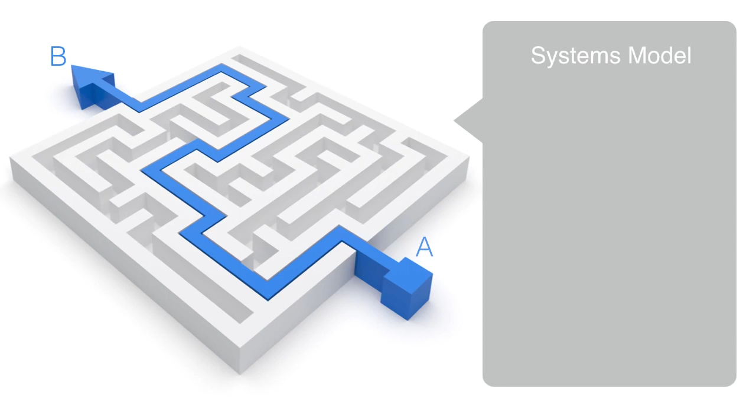In this model, we have a current state A and a future desired state B. This could be anything from being on one side of a river, state A, and wanting to get to the other side, state B, or being cold and wanting to get warm, and so on. We then have some kind of environmental constraints between state A and B. These environmental constraints generate the problem space that we need to resolve in order to get to state B.

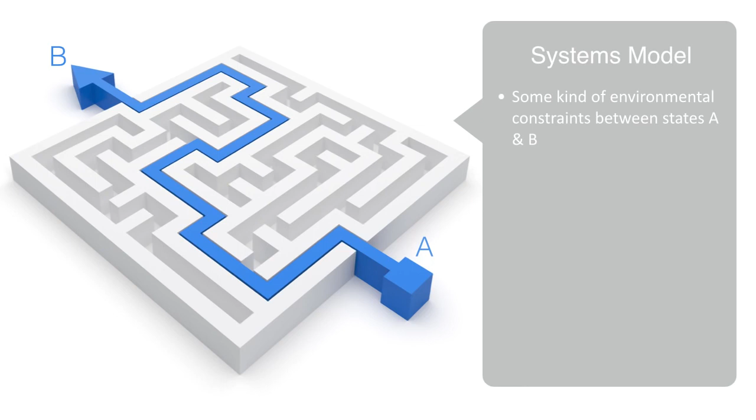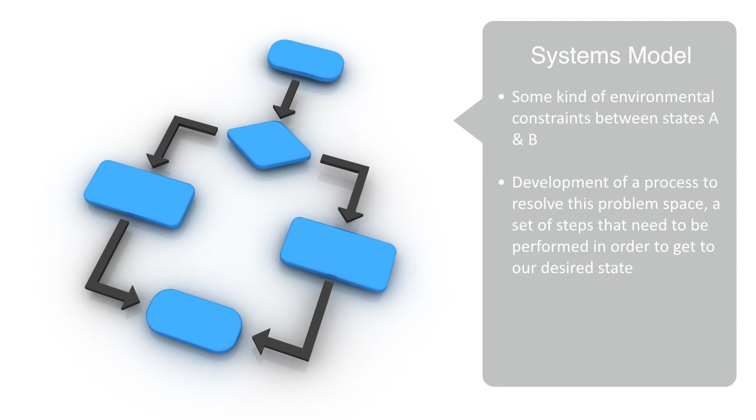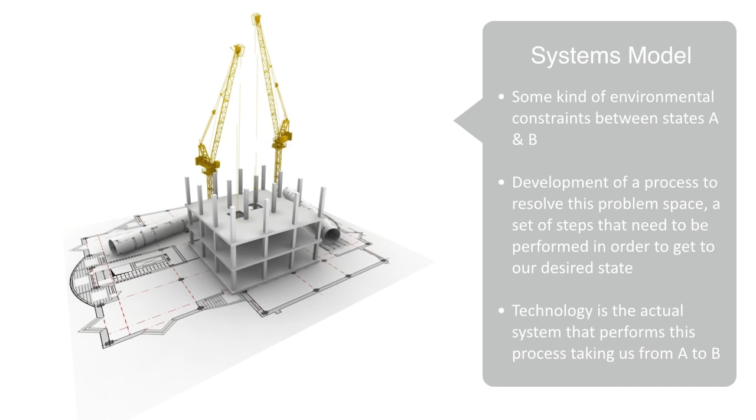Engineering, then, is the development of an algorithmic process to solve this problem space, that is to say, a set of steps that need to be performed in order to get to our desired state. Technology is the actual system that performs this process, taking us from A to B. In this way, we can then think about technologies as systems, in that they have some input of resources, and they perform a function on these inputs in order to produce some desired output.

Although technologies are different from natural systems, as we've already noted, we can only properly give them context by understanding them as also extensions of natural processes.

Technologies are both a very organic part of human beings and an extension of us. Almost all technologies can be traced back to some initial process that was performed by our unaided natural physiology, whether we're talking about transportation performed originally by walking, or telecommunications performed originally by our vocal system.

Through endless iteration of these natural processes and innovation, we have rationalized these processes and embodied them in external automated systems that can typically perform the process more efficiently and effectively. By automation, we mean that through having rationalized this process, we no longer have to look for a solution to it each time. The technology is the solution, we just have to operate it. The word automatic means acting by itself. In other words, the technology has automated part of the process.

I don't need to think about how I'm going to get to work each day. I simply get in my car and drive. I don't even need to know how it actually converts the input to the system, that is liquid fuel, into the functional output, that is personal mobility. And I don't need to think about it because the technology was designed specifically to automate this process.

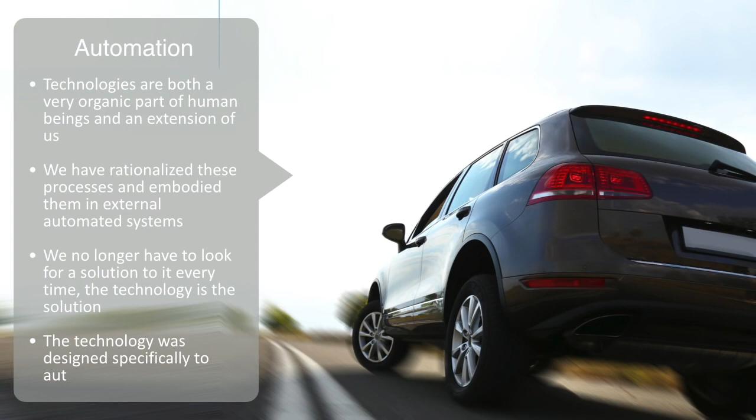All systems operate at some degree of efficiency, and efficiency is a central concept in engineering. The second law of thermodynamics tells us that in this processing of energy and resources, there will always be an increase in entropy. That is to say, when we run this technology system, it will produce some waste product that either remains in the system, degrading its functionality over time, or gets exported to its environment.

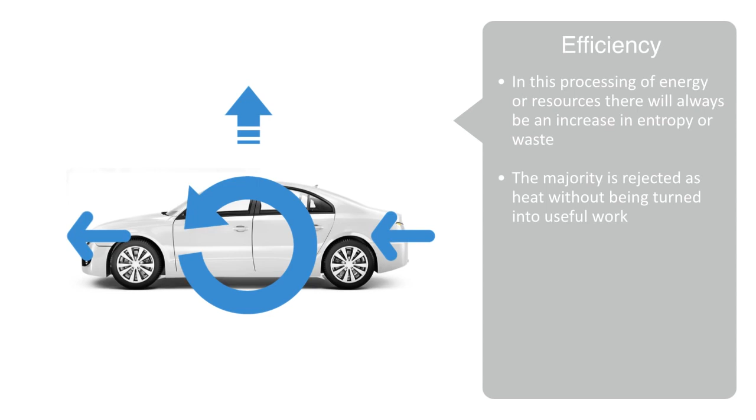When I operate my car, only about 25 to 30% of the energy released by the fuel is used to move the vehicle. The vast majority is rejected as heat without being turned into useful work, and this entropy must be exported from the system or else it will damage its functioning.

This entropy, of course, does not just disappear. The heat, along with other forms of waste, such as noise and gas emissions, go into the system's environment. From this, we can define the system's efficiency and begin to reason about its sustainability.

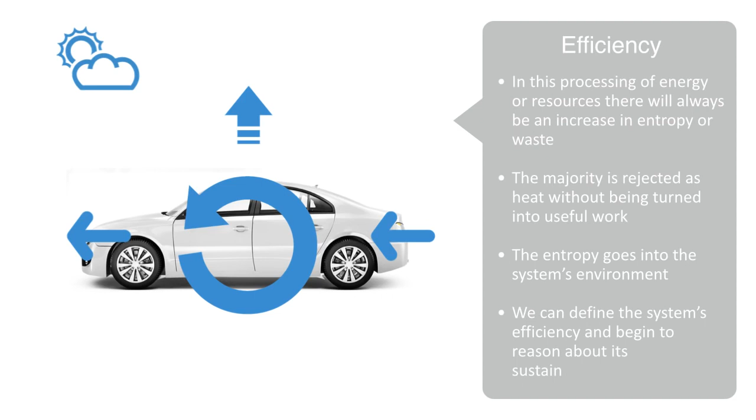Sustainability is another very abstract concept, but in its essence, it describes the relationship between a system and its environment. It is essentially a function of, on the one hand, the volume of resources the system requires, coupled with the environment's stock of resources accessible to the system, and on the other hand, the amount of entropy the system produces, combined with its environment's capacity to absorb that entropy without degrading its capacity to continue providing the system with a future supply of resources.

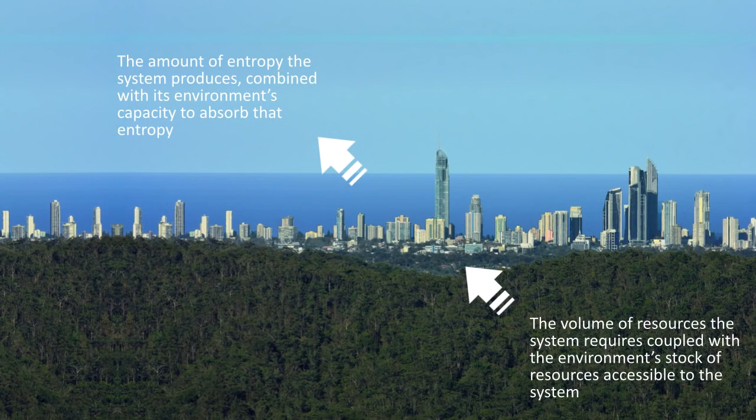In trying to overcome some environmental constraint, we also manipulate the environment. We alter it according to our set of instructions. An artificial system, then, is one that is designed according to some set of principles that do not integrate with the natural processes and thus work to disintegrate the natural environment.

This might also be called hacking, the re-engineering of a subsystem within a larger integrated system in order to optimize it according to a set of principles that do not integrate with the overall pattern of organization, and thus work to disintegrate the macro system and reduce its sustainability.

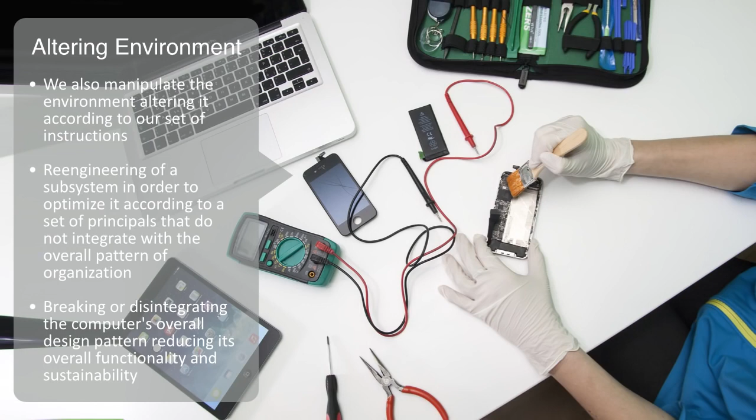Optimizing a computer's processing unit for speed, what is called overclocking, is another example of hacking. We are optimizing a subcomponent and thus breaking or disintegrating the computer's overall design pattern, which will ultimately work to reduce its long-term functionality and sustainability.

When we talk about sustainability and a technical system within its environment, we're no longer just dealing with the quantitative technical efficiency of the system. We have to also ask the qualitative question of why we use the technology in the first place.

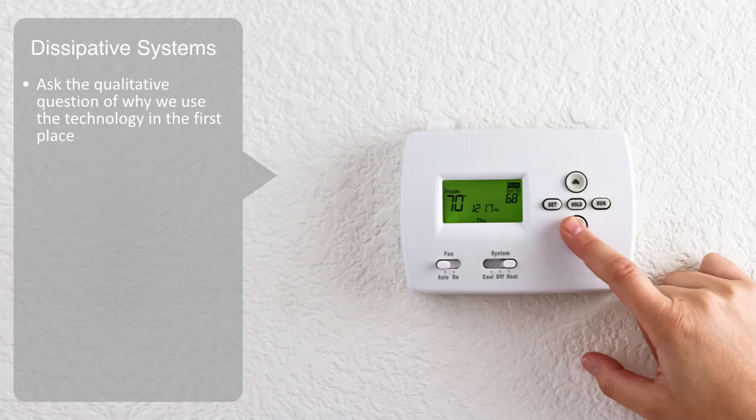When we run a system, it produces some output. If this output is immediately consumed without becoming the input to a new process, then we can refer to this as dissipation, meaning that the energy is dispersed or scattered, thus increasing the entropy and decreasing its capacity to do work.

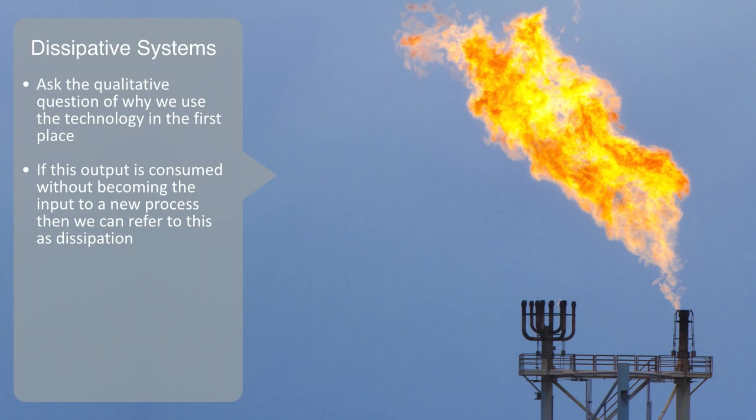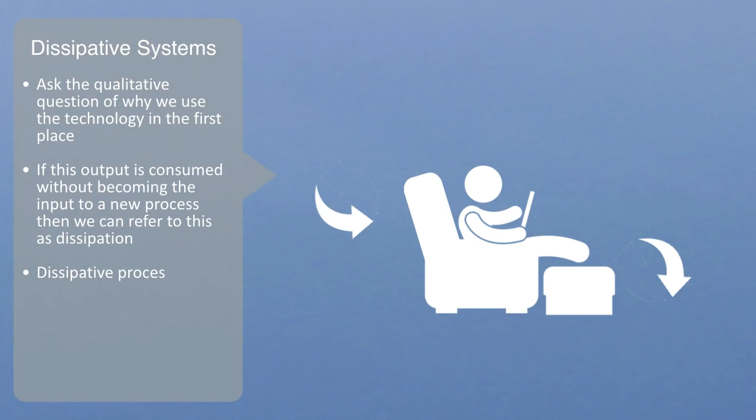The resource has been used up and is no longer available for work, at least not at the same level of functionality as before. If I use my iPhone to play computer games, the output to this process can't be used to enable another function. The resources inputted to enable the operation of that technology have been dissipated. Dissipative processes generate entropy and are typically time irreversible. We can't take the output and go back to feed it into the input again because it has been degraded during the operation.

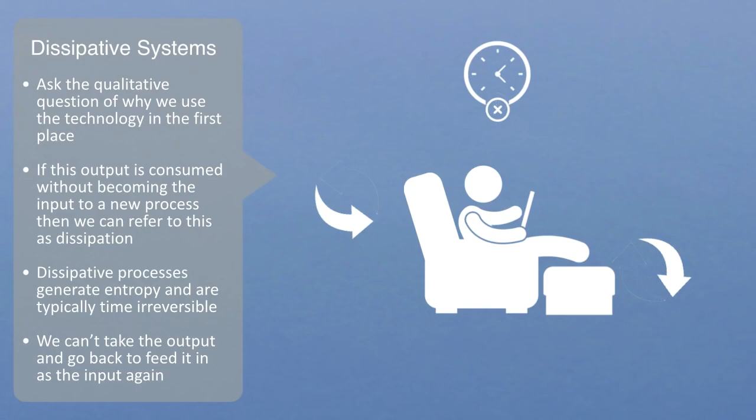Inversely, the output of this system might be used to fuel another. For example, the processing of crude petroleum within a refinery is required in order to produce the input for a vehicle of transportation. This is an example of an anabolic process, that is, one that requires an input of energy in order to refine or synthesize basic resources into resources of a higher quality.

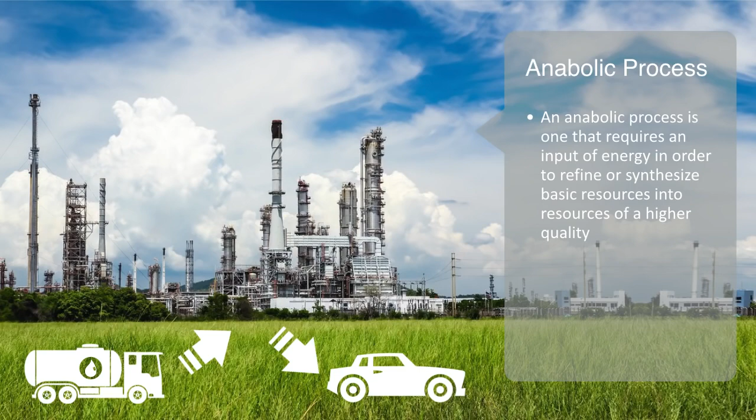The assembly of parts on a production line into a finished product is another example. It requires work to be done, that is to say, the system performing a function in order to produce some throughput of a higher value. The conversion of coal into electricity is another example, as electricity is a much higher quality energy than coal.

With functionality and throughput, we get what is called emergence. When we're supported by a system of technologies that are working effectively, they enable us to function at a new level of organization. Technology offers the possibility for us to be more productive and live a better quality of life.

Infrastructure systems are good examples of this. Unlike consumer goods, the throughput to infrastructure systems like transportation and electrical power networks enable other technologies to function more efficiently. In this way, we get emergence as we move up the different levels of our technological substrate, and thus the infrastructure systems that form the base of this can have a powerful leveraging effect, where when you invest $1 in infrastructure, you can get $3 worth of overall economic value back.

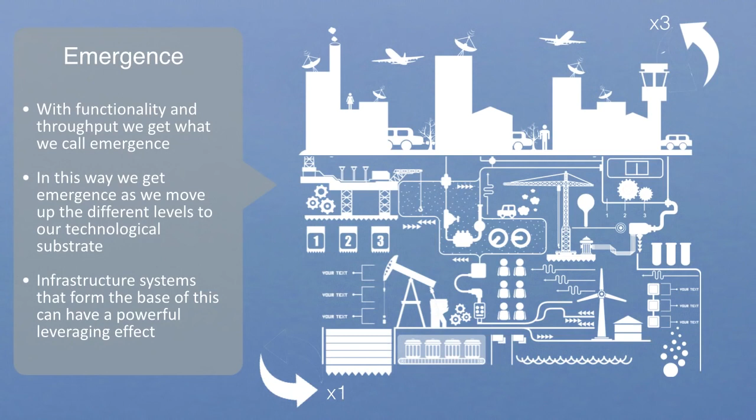New levels of organization to our systems of technology emerge as we go from basic tools to industrial machines to information technology. When these systems work properly and are abstracted away through encapsulation, we can sit on a high-speed train, sipping our cup of coffee and surfing the web, completely oblivious to the many layers of technology that are required to enable this.

When we get functionality, throughput, and emergence of a multi-leveled system, with everything being properly abstracted away, we can get the smoothly running infrastructure systems like that of Hong Kong and Switzerland. Consumer goods like iPhones and sports cars may be the celebrities of technology, but they're enabled by a multi-tiered infrastructure that makes our globalized world go round.

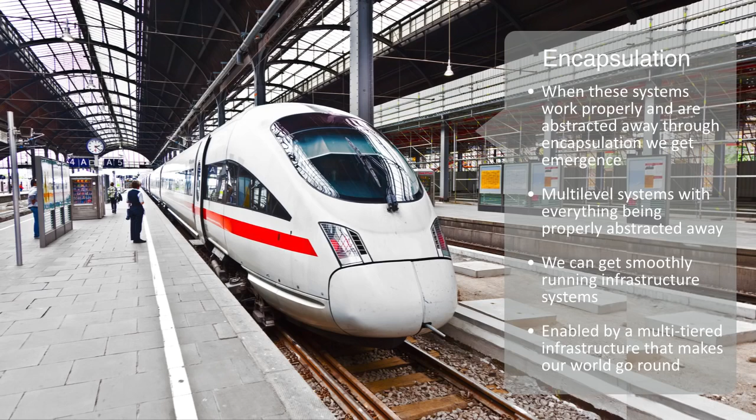To summarize then, no matter how complex, sophisticated, or large the technology we're talking about, whether we're trying to peel a potato, build a website, or move millions of people around a city every day, we're always dealing with the same basic features of technology that we've been discussing in this module. That is to say that we wish to get from one state to another more desirable state, and there will be some environmental constraints that we need to overcome in order to achieve this.

There will be a large possibility space for how we do this, but through engineering, we rationalize the process to develop an optimal automated solution, what we call technology. This technology is a system that performs a function. It performs this function only ever to a limited extent and thus generates entropy during its operation. Its degree of efficiency and the environmental conditions define its degree of sustainability.

When many technologies work together as an integrated system, we get emergence as new levels of organization emerge to create multi-level platform technologies, and this is the technological substrate that our societies depend upon.